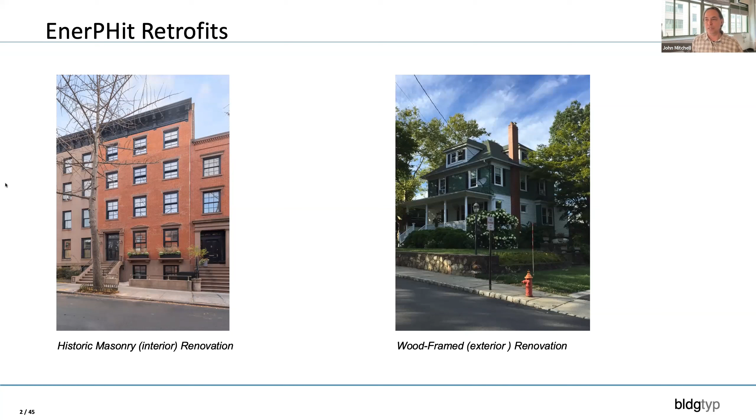It's a brutalist masterpiece from Marcel Breuer, and it's being renovated to the EnerPHit standard currently.

So it's not just single-family homes, it's really anything you are going to renovate - you can renovate to the EnerPHit standard, and we would encourage you to take on some of these more challenging building typologies, because Lord knows we need them.

So I'm going to assume you know about Passive House, that we have these 5 principles, that we're going to super insulate our buildings.

We're going to have continuous layers of insulation. We're going to really emphasize air tightness. We're going to design our buildings such that they're thermal bridge free.

We're going to really focus on high quality window components, installing them correctly, siting them correctly, and shading them appropriately. And we're going to have mechanical ventilation with high levels of heat recovery.

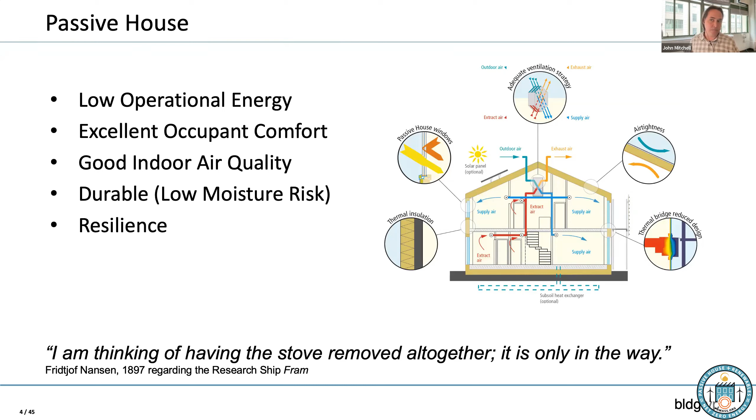So that's a Passive House, right? And we know that for the Passive House standard, the International Passive House standard, we have certain criteria.

We're going to look at the annual heating demand specifically, and the annual cooling demand specifically. Those targets are 4.75 kBTUs per square foot year - just to remind you if you already knew that, and to bring it up if you didn't.

And we're going to also focus on airtightness. The building airtightness is going to be measured at 0.6 air changes per hour at 50 pascals. That's our certification criteria for a passive house building. And then we'll also look at the total energy of the building and make sure it falls under the total primary energy or source energy targets for passive house. That's a passive house building.

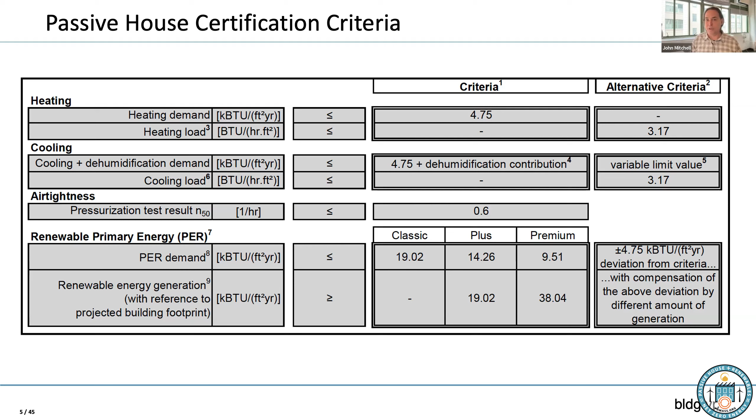That sounds awesome. Why don't we renovate our buildings to the passive house standard? Well, it's kind of hard. There are going to be things that get in our way. We didn't put this building where it is today.

Somebody else decided where it's going to be, where the windows are, and what the structural system is. And we're going to inherit all of those decisions. Those decisions weren't necessarily made with our well-being in mind as passive house consultants and designers. They were made with 1980s thinking, or 1880s thinking, or 1780s thinking, depending on the building you're inheriting. So it's not going to be really ready for us to make it a passive house.

There's going to be things that are in our way. Some of that might have to do with how the building is oriented. It may be facing due east with a ton of glass, or who knows, it may have tiny little windows that don't get any solar gain at all. You may have real challenges with air sealing that building because of the way it's put together, and real challenges with thermal bridging for the same reason.

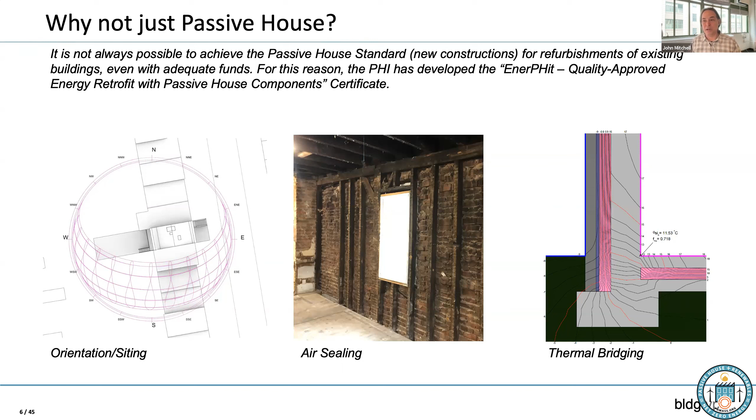So the EnerPHit standard is an acknowledgement of these challenges. It says yes, you're going to do your best to get to the passive house standard, and you may not quite get there. So what we're going to do is relax just a little bit—and I mean just a little bit, it's really not very much—the criteria for passive house certification, in order to help you get over the hump, because we want you to do the best building you can.

We want you to make these high quality renovations, but we're realists. We understand there's going to be a little bit of compromise on a renovation because you just don't have control over all those things. Those compromises are mostly going to be about airtightness and thermal bridging. We can do a pretty good job at insulating these buildings.

We can buy and install high performance windows, and we can do mechanical ventilation with high levels of heat recovery. That's not a big deal. It's really the airtightness and the thermal bridging where things are going to be a little bit of a challenge.

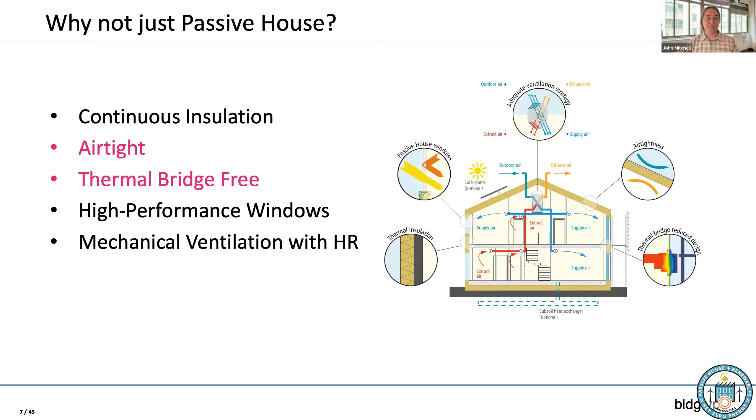So in 2010, as Ken mentioned, the Passive House Institute came up with the EnerPHit standard in acknowledgement of these challenges. And they gave us not one, but two certification pathways. This actually makes it a little more confusing than it needs to be, but it's actually quite helpful. The first certification pathway is the EnerPHit by energy demand method. You could think of this as like passive house in sweatpants.

It's a little bit relaxed from the full passive house certification criteria, but it's effectively the same. Instead of a heating demand target of 4.75 kBTUs per square foot year, we're going to have a little bit more than that. And instead of an airtightness requirement of 0.6 air changes per hour at 50 pascals, we're going to have a little bit more than that. Effectively, it's the same as passive house certification, except for those two minor adjustments.

The other pathway is known as the EnerPHit by building component method, and this is a wholly different beast. This is actually a prescriptive version of passive house, which we don't really see very much.

Passive house is essentially a performance-based standard, but the EnerPHit by building component method for EnerPHit renovations is actually a prescriptive standard, based on your climate zone. You'll have certain minimum R values that you need to achieve for the various components of the building - for below grade walls, for above grade walls, certain maximum U values for your windows and doors, and a certain minimum performance for the ventilation system as a whole.

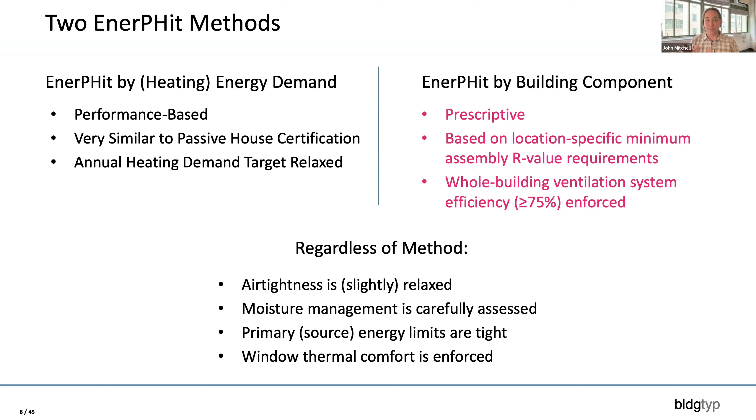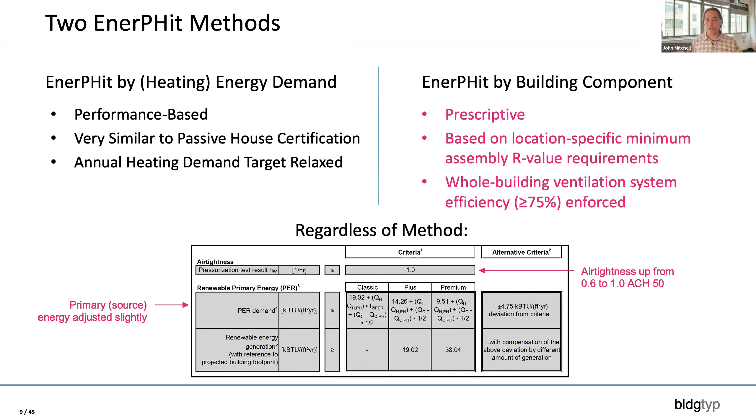So two pathways, many aspects of those pathways are the same, but there are two important differences: one is a performance-based standard, just a slight relaxation of the full passive house certification. The other is a prescriptive standard. Regardless, we're going to be at 1 air change per hour instead of 0.6, and we're going to adjust the primary energy, or source energy target, slightly to take into account that we have a little bit extra heating demand.

Okay, so let's look at the requirements common to both approaches. First, air tightness. Again, when we say it's a relaxation from the passive house standard, we're talking about 1 air change per hour instead of 0.6. And we know that in the United States, people who are actually enforcing the building code are maybe enforcing an air tightness requirement of 3 air changes per hour, if they're enforcing one at all. So this is still a very rigorous air tightness requirement.

That'll be tested according to EN 13829. So that's a multi-point blower door test at both positive and negative pressures. We're going to test the building at 20 pascals, 30, 40, 50, 60, 70 pascals, both blowing in and blowing out of the building. And we're going to average the results and equate them to 50 pascals of pressure. That will be our certification blower door test.

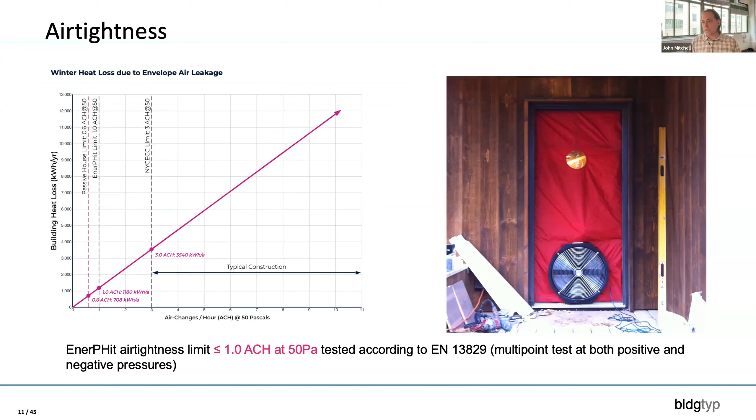So still quite rigorous. The other thing we will be keeping an eye on is the durability of the building. We want to make sure that as we're insulating this building, we're still providing a really robust building envelope with very high surface temperatures. And so we'll be looking at our details and assessing what's known as the temperature factor.

This is the math part that I don't want anybody to get scared by. I know it's late in the day, but this is actually quite simple. The temperature factor is calculated by taking the temperature of a surface minus the outdoor temperature, over the indoor temperature minus the outdoor temperature. So delta T on the bottom, and delta T from the surface to the outside on the top.

And that gives us a unitless ratio of the delta T from inside to outside, and gives us an indication of how resistant that detail is to moisture. On the right-hand side here, there's some climate zone specific recommendations for the minimum FRSI factor that we need for our details. So if you're in Massachusetts, you probably will be targeting this cool temperate climate number of 0.7.

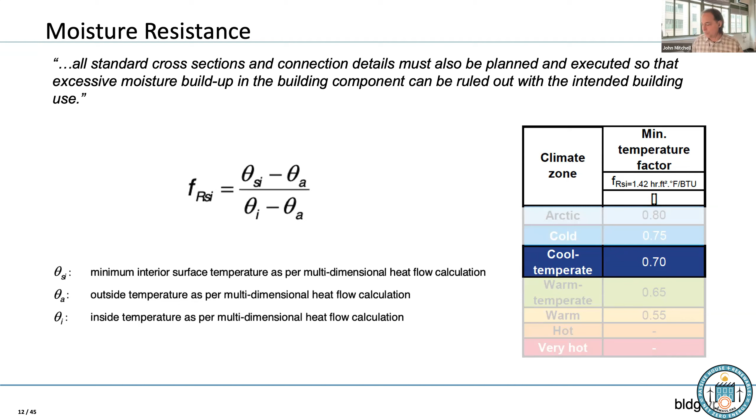What does that really mean? Well, when we look at our details, we're going to be assessing them both for the thermal bridging - that's on the left-hand side here, that detail we're calculating the psi value, the additional heat loss that happens where the two wall types meet. But we'll also simultaneously be calculating the FRSI, that temperature factor, and checking to make sure that at the interior surface of those assemblies we have really high surface temperatures. In this case, you see the temperature factors are 0.85, 0.88 - those are good, those are really high. We have warm temperatures on the interior surfaces there.

We have very low risk of mold and moisture damage. So this is not to say that you'll have to calculate every single detail in your project, but as you're working with your certifier, they may identify certain details and they'll say, hey, we're not sure about this one. Could you do this calculation? And this is what you would do. You would prove that you have high surface temperatures at each of the interior locations on these details.

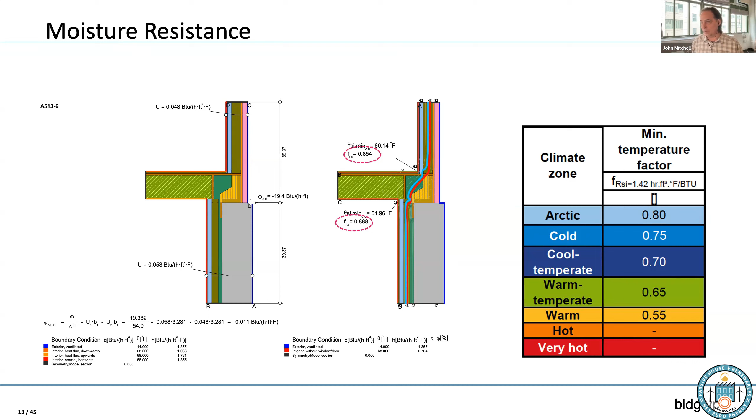Another important element is the window thermal comfort requirements that are part of the PHI's passive house standard. So these are specific to PHI, and quite different if you're used to working in PHIUS projects. So it's important to sort of zoom in on these real quick.

We know that windows can be a problem for occupant comfort, right? We know that those cold surface temperatures in the wintertime can really make us feel cold. They can steal our body heat, we'll be radiating heat towards those cold surfaces, and we'll be made to feel uncomfortable by them. And historically, we've taken care of that by putting heat sources under the windows. Put our radiators there, as you can see behind me. But we want to manage these things passively, not actively. So we want the window itself to provide excellent thermal comfort.

And the PHI thresholds for thermal comfort are quite rigorous. They're more conservative than what you might be used to. They're more conservative than the ones that are in the standards that are referenced by PHI. And the reason for this is because these thermal comfort thresholds are a proxy for a whole bunch of other different things. So it's not just about the way that surface is making me feel because of radiative asymmetry, temperature asymmetry between myself and that window. It's also about the stratification that occurs in the room because of low performing windows, and convective looping that can happen as a result of low performing windows.

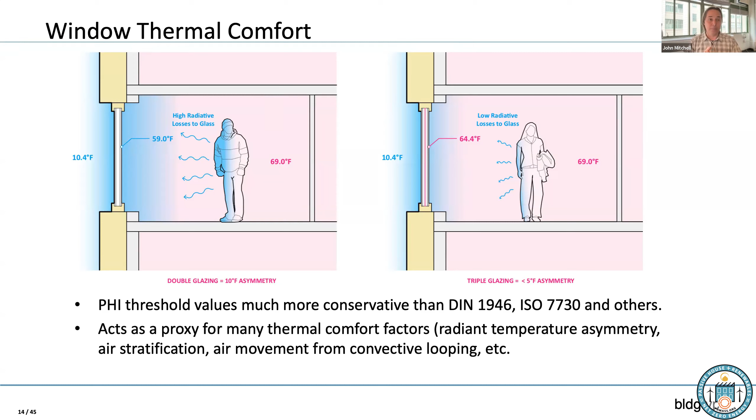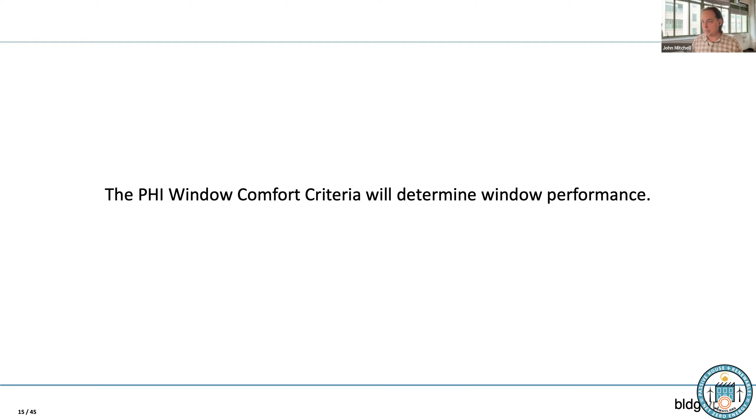So this comfort threshold built into the PHI standard is taking all that and kind of condensing it into one thing. And it's addressing all of those things with this one test where we test the performance of the window. And so it could be quite a challenge. And just to put up the most boring slide ever, the PHI window comfort criteria will determine window performance. This is what's going to drive the window performance of your EnerPHit project, also your PHI certified project, but specifically in this case, your EnerPHit project.

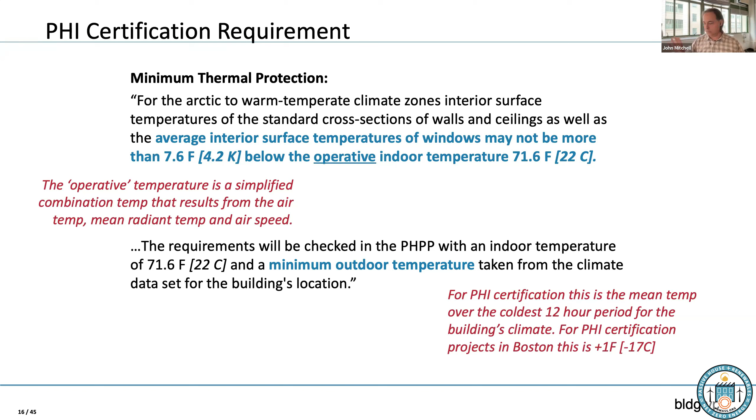The limiting threshold is 7.6 degrees Fahrenheit difference between the operative temperature in the room and that window surface on the coldest 12-hour period that your building is going to see. That's pretty rigorous, right? So for Boston, we're looking at 1 degree Fahrenheit outside, 71.6 degrees inside, and that window has to be less than 7.6 degrees colder than the room. So that window has to be somewhere around 64 degrees Fahrenheit. Passively, just by itself. That's a very high performing window.

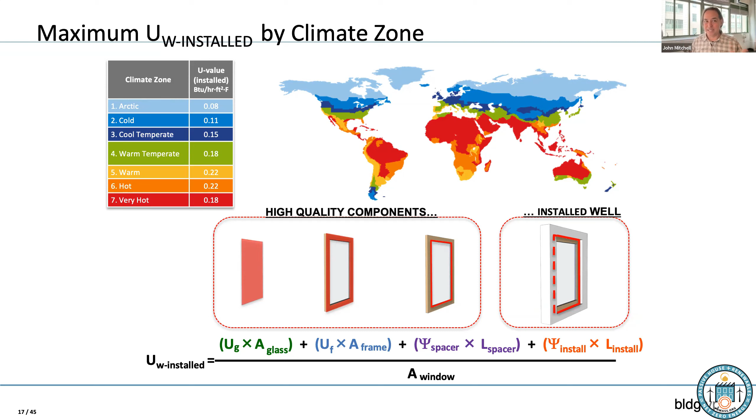It takes into account not just the window itself, but also the way the window is put into the building, which makes this an even bigger challenge for renovations, because in renovations, we don't have as much control as we might like over our window installation details. So the U value of the window that's required to meet the comfort criteria, which you can see in this table on the upper left, is a combination of the performance of the glass, the frame, the spacer that holds the glass panes together or apart, and the way that all of that is put into the wall. So all of that gets combined into the total U value of the window as it's installed in the building. And that's what we evaluate this comfort criteria on. So not only do we have to buy good windows, we have to detail them correctly so that we don't lose the performance of the window in our installation thermal bridging.

So all of this will get checked in the PHPP. We don't actually have to calculate whether or not our window is meeting the certification criteria with a pencil and paper. We will just plug the windows into the energy model, and the energy model will hopefully come up with a column of no red check marks. This one came up with some red check marks. And you can see here, this is a PHPP for a project based in Boston, Massachusetts.

The outside temperature, the design temperature for the window comfort criteria, is 1 degree Fahrenheit. The recommendation for a U value of the window installed to meet that comfort criteria is a U value of 0.15. So a really good window installed really well. So this window, we would take a look at the detailing. We could see if we can improve the detailing. If not, we would see if we can go back to the manufacturer and improve the performance spec.

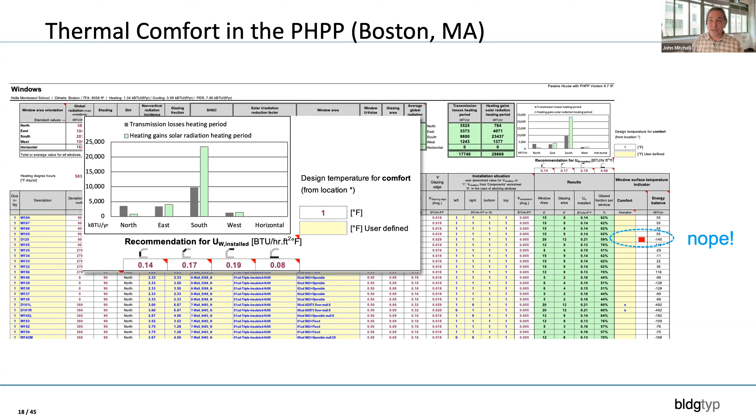If we can't do that, what do we do? Well, there is fine print. There are exceptions. We have things at our disposal. We can actually go back and add heat to that window. We can deliver heat at the perimeter of the building. That thing that we're sort of avoiding doing mostly in Passive House because we don't have to, we can do in this case to overcome the relatively poor performance of a few windows, doors in the project.

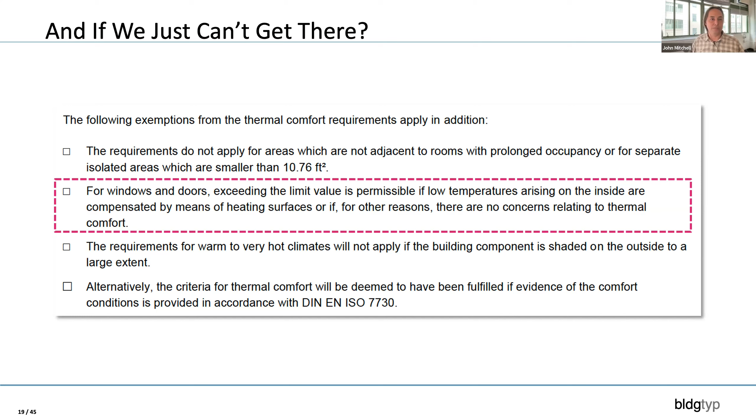So we can go old school. We can install a radiator underneath that poorly performing window, or we can go slightly newer school and put some electric heat mat underneath a poorly performing door like we've done here. This will get you over that requirement for passively managing the thermal comfort of the window. So you're actively now managing it by adding heat at the perimeter of the building.

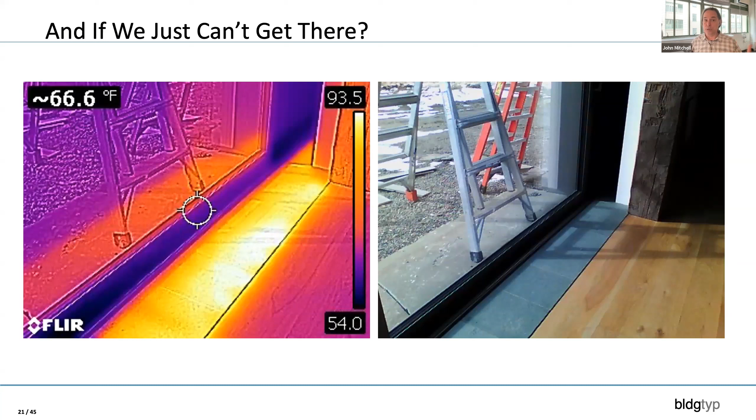So on renovation projects like that Pirelli building that we saw earlier, I think that's what's happening. They aren't able to get the windows spec that they would need to meet the comfort criteria, and so instead they deliver heat at the perimeter of the building. Okay, so those are the things that were common to both certification pathways, the EnerPHit by energy demand and the EnerPHit by building component method.

So let's look specifically now at what this EnerPHit by demand certification is about. It's a climate zone specific threshold for the annual heating demand that adjusts as we get farther north, because it'll be harder to hit your targets as we go farther north. So for the warm climate zone, no adjustment at all. Warm temperate, where I am in Brooklyn, New York, 6.34 kBTUs per square foot year. For the cool temperate, 7.92. And as we go to cold and Arctic climates, it gets even higher.

So in most of Massachusetts, you'll have a cap on your annual heating demand of 7.92 kBTUs per square foot year. Cooling is equal to the passive house requirement, so 4.75 kBTUs per square foot year, plus a little bit of additional for dehumidification, if you have a dehumidification requirement in your region. Otherwise, this is really just passive house, a little relaxed.

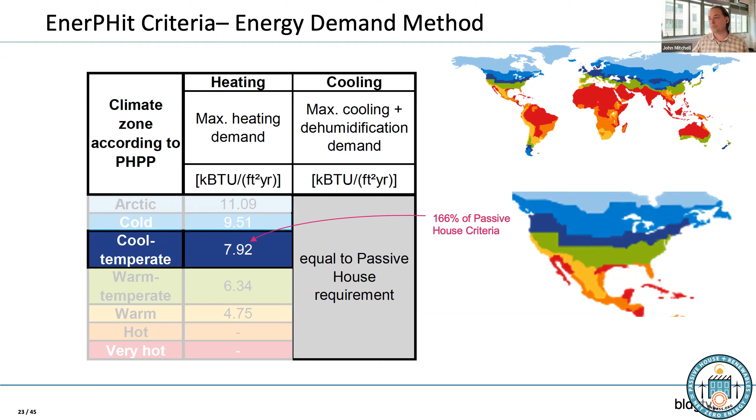The EnerPHit by building component method, again, this is that second pathway, the prescriptive version of passive house. The table's more complicated, everything's a little bit more complicated. So again, it's climate zone specific, but we have separate requirements for different components of the building. So going from left to right, there's the ground, which is calculated on a per project basis. The exterior insulation of the building, depending on your climate zone, starts at, for the warm climate, 11.36. So an R value of 11.36 for your exterior building components.

And if we go all the way up to the Arctic region, we need an R63 for all of our exterior building components that are exposed to the ambient air. However, let's just zoom in on your climate zone. You see that the exterior insulation for the cool temperate climate is roughly an R38. So that's a combination of all of your walls and roofs that are exposed to ambient conditions.

However, if you insulate that building from the interior, like we do with many historic buildings, masonry retrofits and things like that, your R value requirement is 16.2. So you only have to hit an R 16.2, average of all the R values in your project, in order to meet the certification criteria for the EnerPHit by building component in the cool temperate climate. That's not that bad. That's not that hard. We do that with masonry retrofits all the time.

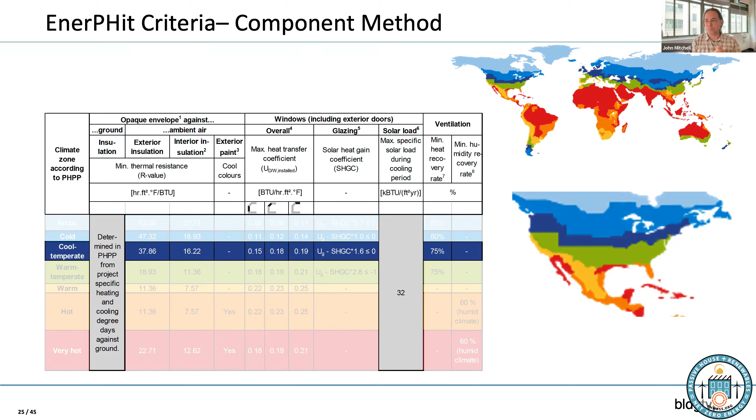Okay, that's not just the box that you buy though. So that 75% efficiency takes into account the ERV, the ventilation component, the HRV or ERV, plus the losses that are associated with the ductwork from that unit. So if you have like an 85% efficient unit and then you throw like 150 feet of ductwork on it from between the unit and the outside, the total efficiency of that unit will go way down.

It also takes into account things like range hoods, exhausting dryers, or other exhaust-only ventilation sources. So that 75% is a total building ventilation system efficiency, which can be very challenging to hit if you have more than a couple of exhaust-only sources. So something to be really careful about and to be aware of, this is the thing that makes the EnerPHit by building component a little bit challenging, is to really hit this total ventilation system efficiency criteria of 75% or greater.

We start with ERVs. ERVs are already a little less efficient than HRVs, but they're the right thing to do in most of the climates that we work in. So maybe the unit is like 82 or 83% efficient, something like that. And then it's a renovation, so you can't necessarily put it where you want. So you end up having some ductwork between the unit and going to the outdoors. So that'll cut down on the efficiency.

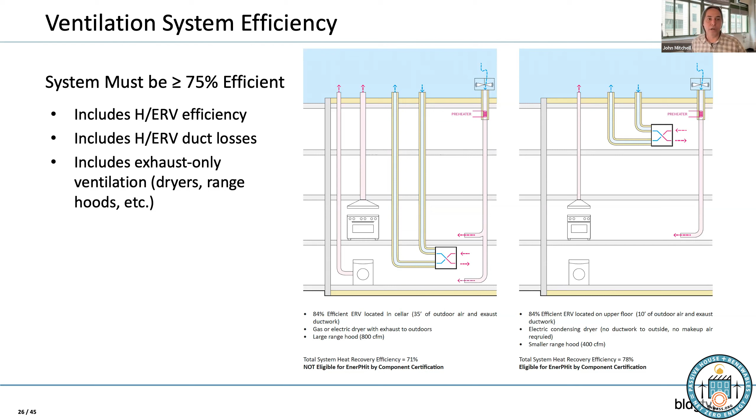And then we want to ventilate the buildings properly. We want to exhaust air from the kitchens. So that's going to cut down on your efficiency. And pretty soon you're below that 75% threshold, and there's not much to do. So something to flag early in your renovation projects is this total ventilation system efficiency.

Now, again, for this certification, there is fine print, particularly if you're working on historic buildings. There are exceptions. And if your Heritage Council, your Landmarks Commission, whoever it is that has things to say about the exterior of your buildings says you can't replace these windows, that doesn't mean you can't necessarily do an EnerPHit renovation. You can get an exception for these things.

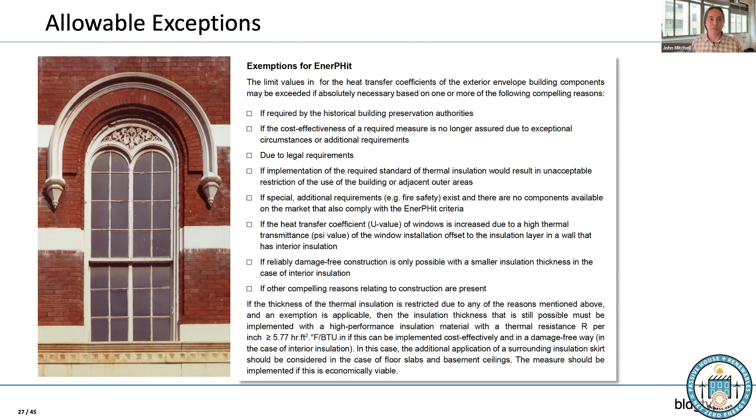PHI will push hard on these things. They'll want you to really do the best that you possibly can, and to push whoever's asking you not to do the thing, to do the thing. But there are exceptions available to you. So take a look in the guidebooks for this fine print that will help you.

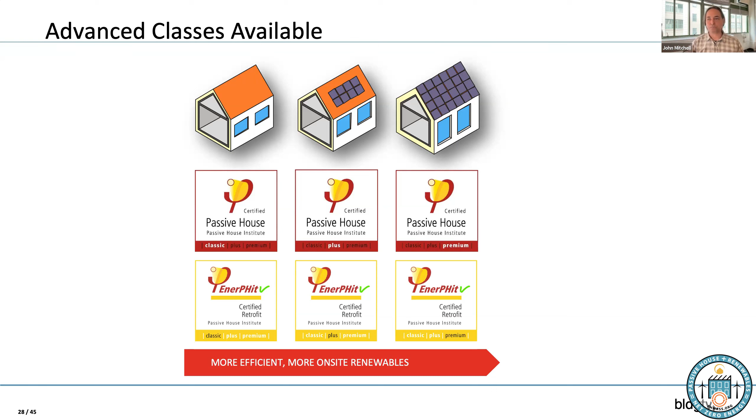Another thing that's really amazing about the EnerPHit program, I think, and it's very useful, particularly for larger projects, if you're managing a building portfolio, or if you're managing a larger property, and you do this thing where you plan out when your roof is going to need replacing, when your windows are going to need replacing. You can do what's known as a step-by-step retrofit. And it's something that's sort of codified within the EnerPHit protocol. And you can plan out your retrofit, and it could be a 30-year project.

And you could say, in year one, I'm going to replace the roof because I have to. The roof is falling off. And so I'm going to replace that, but I know that I can't do anything else for then 5 more years because I don't have any money, and my windows have 5 more years on them. And you could plan out a renovation over a long period of time, build it in the energy model, build the PHPP for it, and sort of show your work, show how you're going to eventually get to a full EnerPHit project.

Register that project with PHI, and then after you've completed 20% of that work, you can get a letter of pre-certification. It says, hey, you're on track. You've shown us that you intend to get this to full EnerPHit certification, and we'll give you a document that says that you're doing the right thing and that you're on track to hit your goals. And then you could just implement those changes as time and money permit over a long period of time. And so at the end of 20 years, you could have an EnerPHit building without doing a full gut renovation.

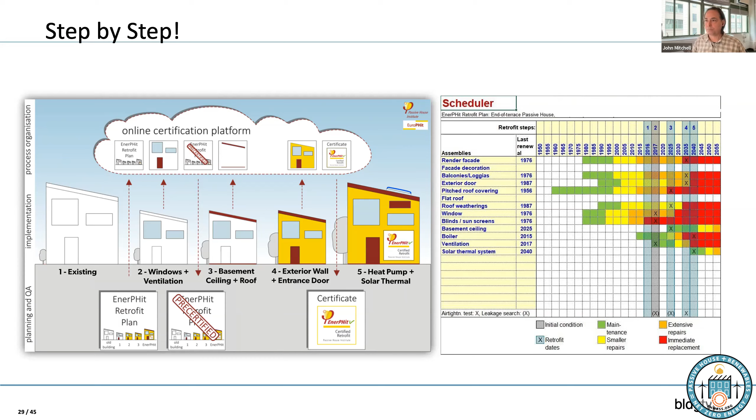Okay, let's look at a couple of examples. I'm not going to dive into too much detail, but let's start with a masonry retrofit.

This is a row house here in Brooklyn, New York. It was built in the 1840s, we think. It's in a landmark district, and the existing conditions weren't so great. So it's a valuable building because of its location, and it's a really neat building because of when it was built. It was just kind of a sad building because of its condition.

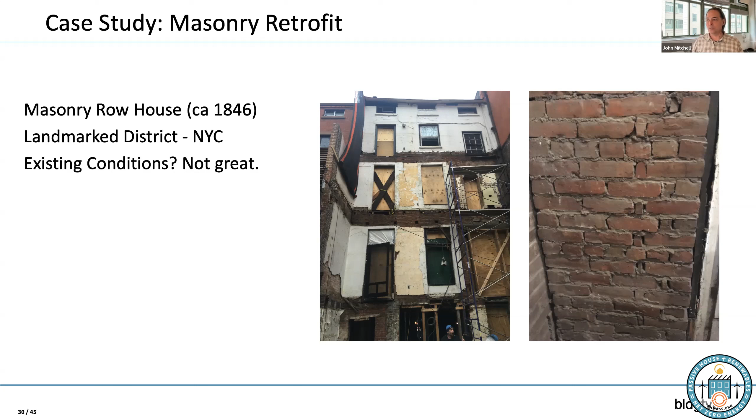But that's the great thing about doing a full renovation like this, is we can give a building the attention that it really deserves. This is a once every 150 or 170 years opportunity to really peel it back to its bones, build it back up, and get it ready for the next 100 years.

So the strategy here was to do an interior renovation. It's a landmark building, so we weren't going to touch the front facade. In fact, on this one, landmarks didn't want us to do much on the rear facade either. There were some extensions allowed on lower levels, but the masonry walls that were rebuilt had to be rebuilt as regular 3-wythe brick walls, which is pretty uncommon.

So we took the same approach on all of the exterior walls: interior insulation. First we start with air sealing at the masonry surface after repair, then insulation, then air tightness on the front and rear, and then a service cavity for running electricals and things like that. These are details you may have seen before for historic masonry retrofits.

We also did ventilation - dedicated ERVs separate from the heating and cooling system, as well as kitchen ventilation, so extract air ventilation with the kitchen hood.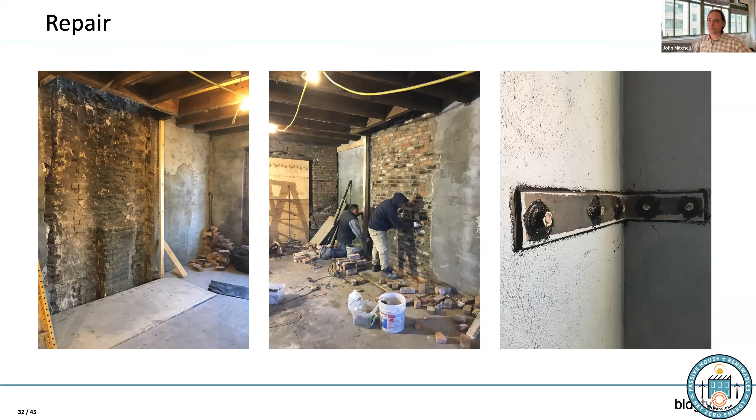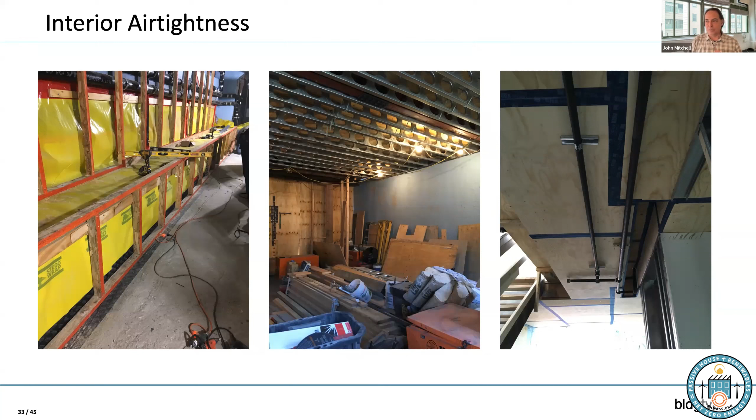So from the bottom up, going left to right, the air tightness layer is the subslab vapor barrier that comes up the walls about 4 feet in this case, then transitions to a fluid applied air barrier vapor retarder on the walls. And then at the roof - not the best picture on the right hand side - we transition to plywood on the underneath side of the roof as the airtight layer there.

And again, windows, windows, windows - that's really an important thing in all of our EnerPHit projects. It's a hard thing to do well, particularly in historic masonry projects, because we have to push the window out. It has to be where it was before, out to the front of the masonry layer, which is not continuous with the insulation layer we've installed on the inside of the building. So we have to bring those two things together. We have to make space around the window installation for insulation so we can connect the window to the insulation layer and have as low thermal bridging as possible, so we get as much out of those windows as we can and meet that comfort criteria.

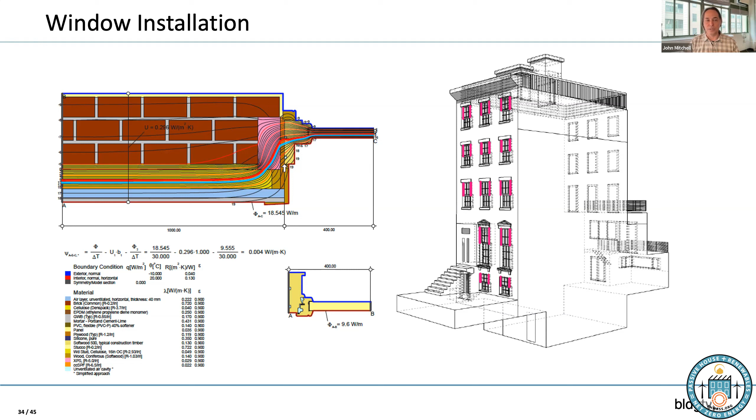On the sides, we're seeing a jamb detail here. It's not so hard at the sides because we had weight pockets there that used to house the window weights that would hold the windows up, the double hung sash windows. When we remove that, we expose those window pockets, and those are great places for insulation. At the head and the sill, it's not always that easy, and sometimes we have to actually move a lintel up at the head and move some brick down at the sill in order to connect the insulation layer to the window.

In the end, it looks amazing. It's a beautiful brick row house ready for the next 100 years.

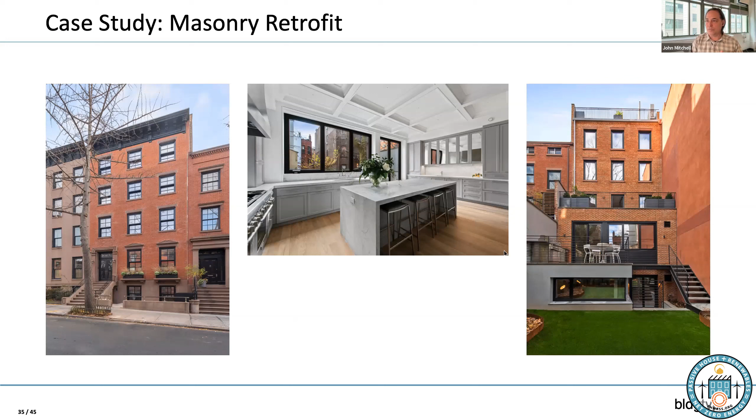And then the other one I want to just show you real quick, and we can have a little discussion after. This is a historic wood frame building built in the early 1900s, in northern New Jersey, so it's at climate zone 5A. And this is sort of the opposite approach. Instead of an interior insulation strategy, this is a fully exterior insulation strategy.

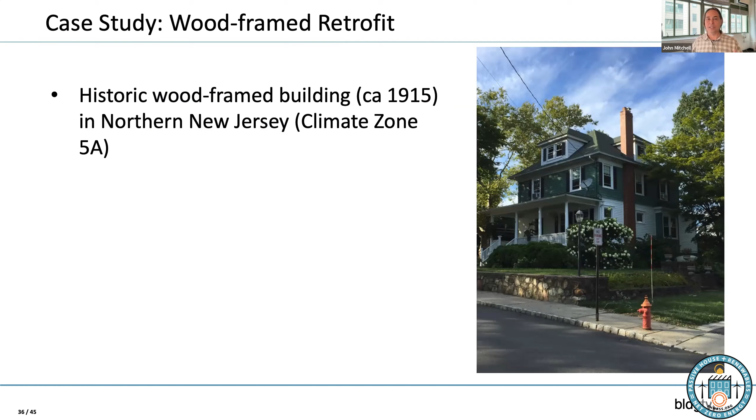We have this excellent client who is an engineer and is super up for it. He gave us this wonderful documentation at the beginning, telling us exactly what he was looking for in a building. He's saying all the right things—it's almost like he'd done his research. He's looking for improved indoor air quality, excellent thermal comfort, low heating energy demand, and he wants to retain the charm of his 107-year-old building. So these are really great things.

And then he sent us screenshots from his fuel bill. His home is the one there in the middle that is towering above the others. He's using a ton of energy to heat his big 4-square building, and he would like that to change. He wants to crush that little greenhouse on the right-hand side—that's his goal.

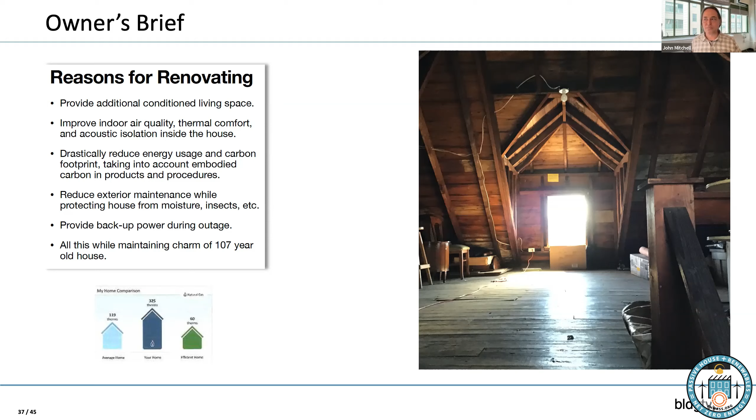So the strategy here is to take the exterior finish off, cut the eaves off, take the detail off the exterior of the house, install a weather resistant barrier / air barrier on the exterior sheathing, then add insulation, and then put all that nice detail back.

We're going to add, again, dedicated mechanical ventilation with heat recovery and range exhaust, and we're going to switch from his gas boiler to a heat pump system for both heating and cooling and domestic hot water.

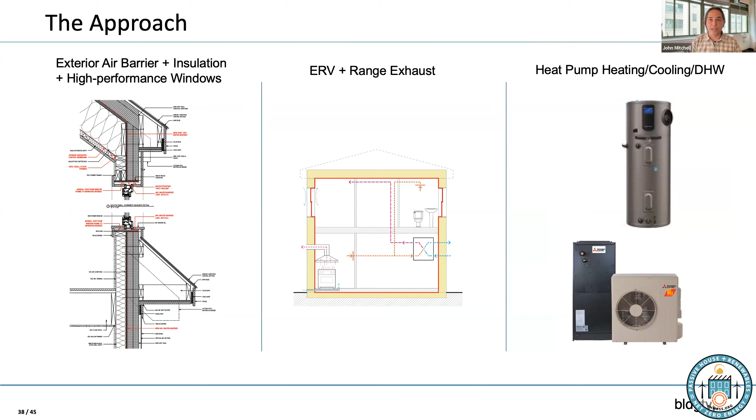The assemblies look like this. We were able to actually remove the existing floor in the basement, which is not always possible, but we got to in this case. So we were able to put some insulation under that floor before pouring a new concrete slab. We're able to get to the foundation walls all around the building, so we're going to do both interior and exterior insulation on the foundation walls.

The above grade wall is the existing 2x wall with insulation plus 4 inches of exterior insulation, which was originally spec'd as wood fiber, but it was not available either in time or for the right price. So we're moving to mineral wool and then a vented rain screen. And at the roof, again, the existing roof framing plus 5.5 inches of exterior insulation, mineral wool in this case, and then a vented assembly is there as well.

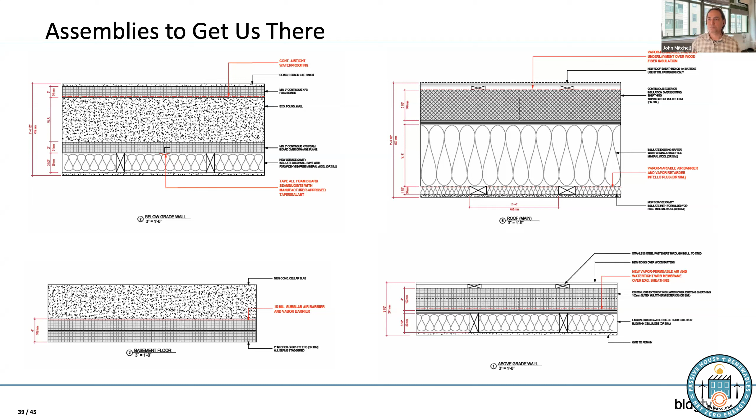For the windows, we're extending out the existing window bucks by installing a plywood surround, pushing the window out towards the continuous exterior insulation layer. And again, we're always looking at those surface temperatures on the interior and trying to get as high performing a window detail as we possibly can.

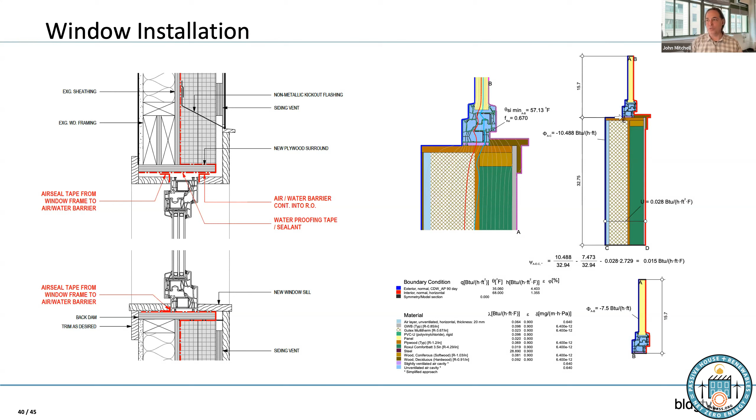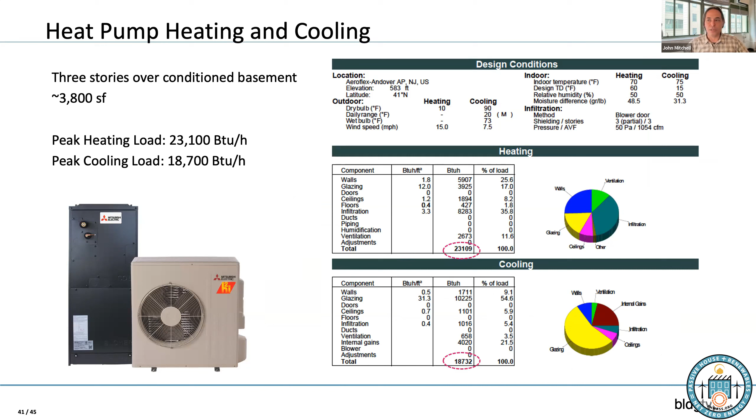So it's about 3,800 square feet of building. Total heating load is about 23,000 BTUs per hour. I asked the client what his current boiler is rated for—it's rated for 122,000 BTUs per hour. I'm not sure that was sized correctly, but we're going from 122,000 BTUs per hour of capacity to 24,000 BTUs per hour of capacity. That's cool.

So in our EnerPHit projects, we get almost all the stuff. We get excellent occupant comfort, really good indoor air quality, durable low moisture risk assemblies, good resiliency, and low operational energy. We just don't get as low operational energy as if we had a full passive house building. It performs a little bit less well.

And the graph on the right shows one of our projects. We typically try to show clients what it takes to go from code minimum to EnerPHit to passive house, and show them what assemblies would get them there and all the measures they'd have to take. You can see the difference in total heating and cooling energy demand between the EnerPHit by component version and the EnerPHit by demand version is a little bit. That EnerPHit by demand version is a little bit more rigorous, and it's a little bit more rigorous still to get to full passive house.

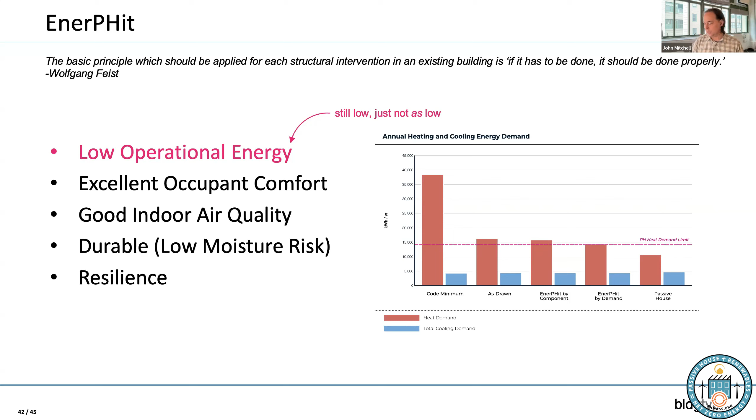So it's not a huge penalty, it's just we're going to pay a little bit more for energy. But in the meantime, we've got a really excellent building that's going to last for a very long time and deliver really, really good occupant comfort.

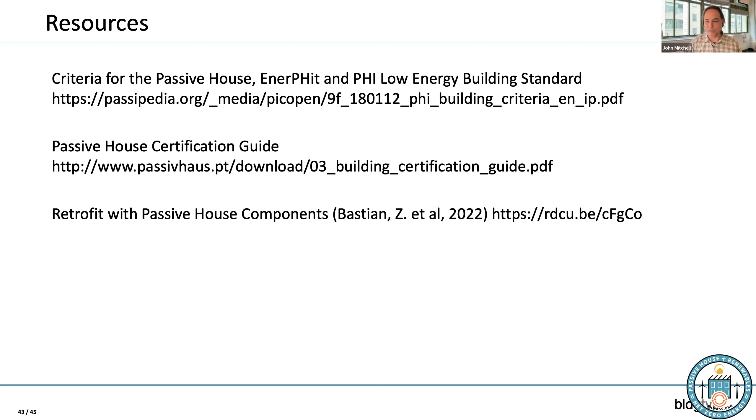I'll put these links somewhere more useful than in this slide, but most of this information is available to you in PHI's building standard document, which is a merciful 26 pages. It's really not a huge document, and it covers both full passive house certification as well as EnerPHit certification. It gives you the full guidelines there, so I'd point you to that. There's also a couple more articles that are quite interesting and useful, but I'll maybe put those in the chat once we're on to discussion.

And I'll let Ken jump in and talk a little bit more, just remind us again about the conference, and then we'll take questions.

Thank you, John. I don't have really anything to add other than to say there are a couple of great retrofit sessions at the conference. John is going to be in a great one as well. But the other one I'm thinking about is a 20-story occupied building retrofit for affordable housing in Ontario that's just finishing the third of three phases of EnerPHit retrofit. Super interesting, lots of lessons learned, and they are really going for the Holy Grail in terms of pulling it off. That should be super interesting, as well as a lot of other great content.

So yeah, I hope we have a nice discussion here. Thank you, John. Be there—I always learn something.

Good, yeah, thank you John. That was an excellent presentation, a good overview of the EnerPHit program, and I enjoyed seeing the two case studies presented there briefly. We're going to turn it over to questions and discussion.

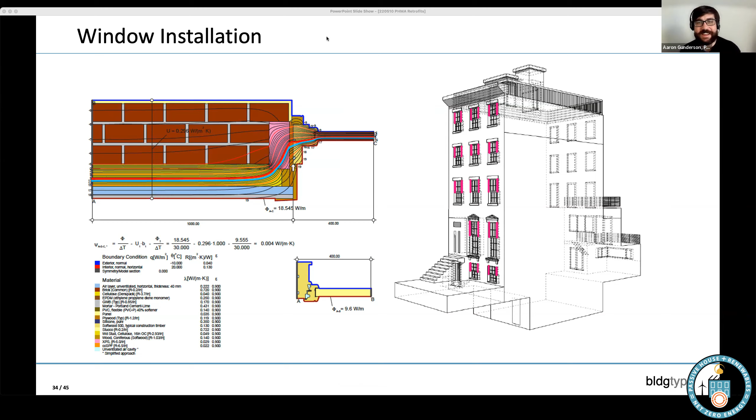Transitioning a little bit away from windows, we had a question about the cost of that New Jersey house renovation—if you have any idea offhand of the cost of that project. Too much is the feedback we've gotten so far, but that's always the feedback we get in the first round of pricing. I don't know what it's supposed to be, but it's certainly too much.

I don't have hard numbers yet, and it's not something we're usually privy to. But I think the owner is committed to going above and beyond here. It's not for the faint of heart, I would say.

To give folks a way to think about it, what in your experience has been the largest cost drivers for passive house renovations, in a project like that in an old wood house? Well, I think in this one it's really the exterior approach - the labor involved in taking down the existing finish and building back in a thick insulation layer. And right now insulation is expensive. Maybe insulation has always been expensive, but it's particularly expensive right now. So it's difficult to get it into the project. It's a long time horizon to pay it back. It's just the way it is. We're doing this for a long-term investment, but it's pretty long.